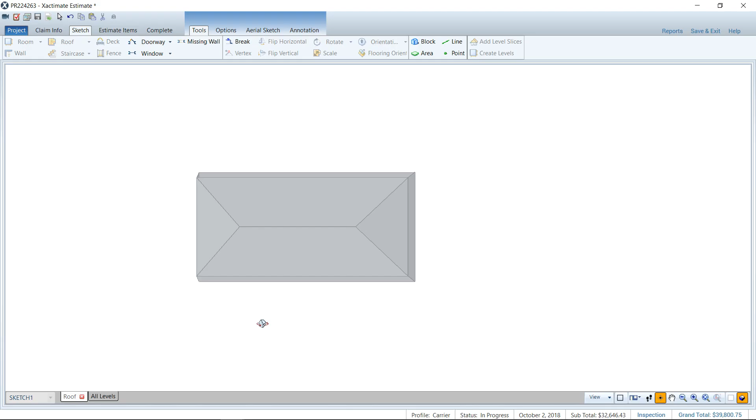It is a hip roof with the gambrel sides that you can see here, very unusual shape. I think it'll be useful for those that haven't ever built a gambrel roof. It's not a true gambrel because it's got this hip on top, which is very interesting, and then got these extending sides. So as you can see, that's going to be a pretty tricky roof to create. We have to set the hip and then adjust the eave heights and do some other fun things. So thought it was a good example of a gambrel style roof that's just a little bit unique and unusual. So let's go take a look at how to sketch that roof.

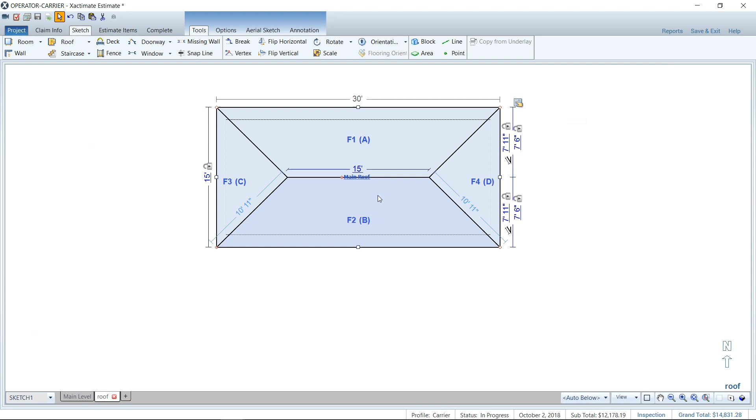So I've already built the main roof here, the main hip in Sketch, and it's got a 4/12 pitch, nothing fancy, just a normal hip. Now what I'm going to do is go up to the roof tool here and grab a flat or shed roof. Now remember the arrow pointing up the slope on the flat roof, and I'll set it here just for you to see an example.

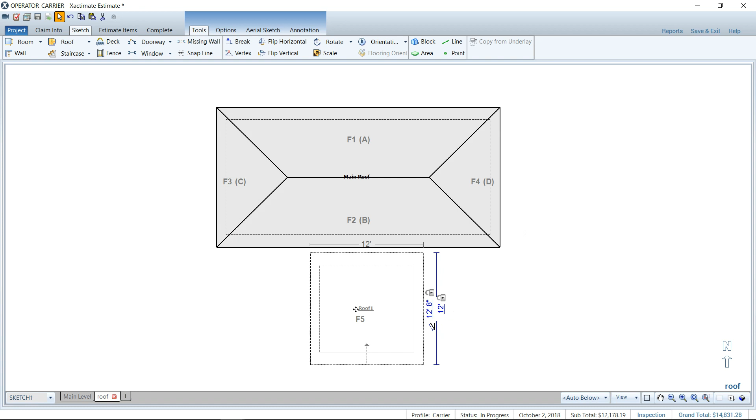The arrow is pointing up the slope. So I'm going to start here on my south face of the main roof to attach this so it goes up into that slope. And I actually attach roof edge to roof edge here. We can have a debate on why and the reasons a little bit later. I like it because it just snaps too, and I'm only doing roof covering here. I'm not worrying about soffit and those other things.

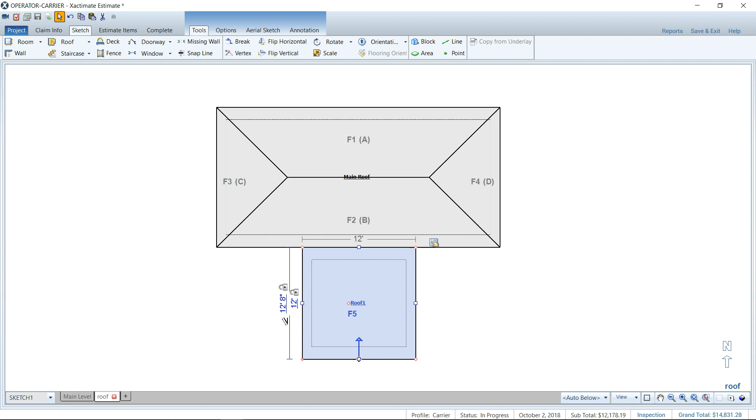And so this works for me. Just watch your dimensions, make sure that you're including all of the roof space rather than figuring in the soffits underneath and going about it that way. So if you want to have a debate about that in the comments, no problem, I'll talk to you down there. But this is the way I'm going to do it, is roof edge to roof edge.

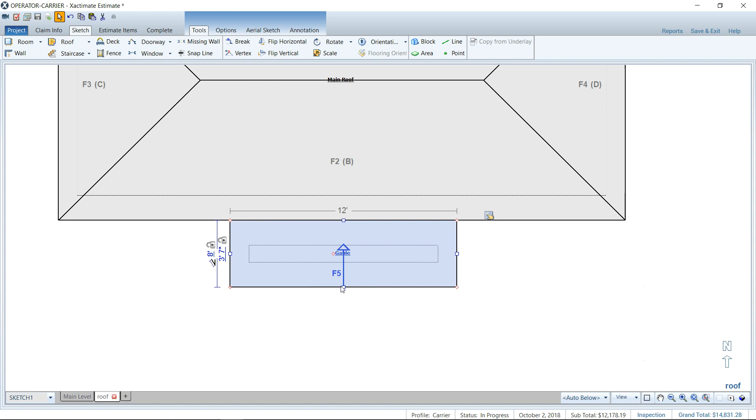And actually, let me go ahead and name this roof while we're here. Go to the properties, and we're actually going to make this a 24/12 pitch as well, as what it was out in the field. Pretty extreme pitch there for the gambrel sides. And I believe once it was vertexed out here, so I'm just going to expand it out to the roof edge here where it meets the hip.

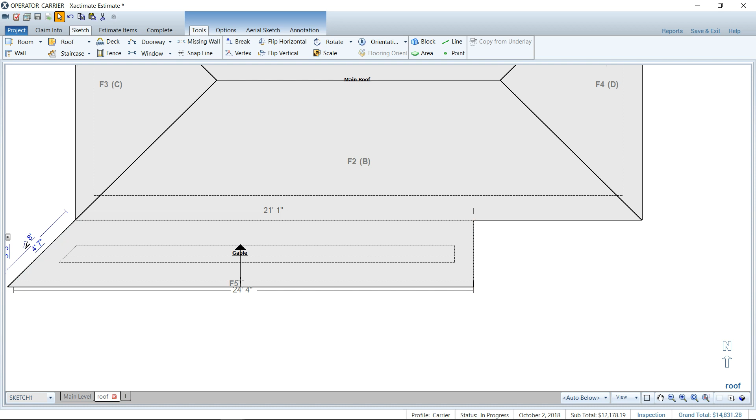Then we're going to grab the little diamond and pull it out to meet the hip angle. And it was actually, I believe, 4'6" or something close to that here for the roof edge. Let's see if it'll let me pull it in. It's being persnickety to 4'6".

There we go. All right. And I'm just going to go ahead and form that on the other side, meet the roof edge, and use the diamond right there to pull that out to meet the hip, like so. Take a look at it in 3D, and it's going to look pretty crazy because I need to adjust my eave heights. So that's the key pivotal thing here, is knowing to adjust your eave height.

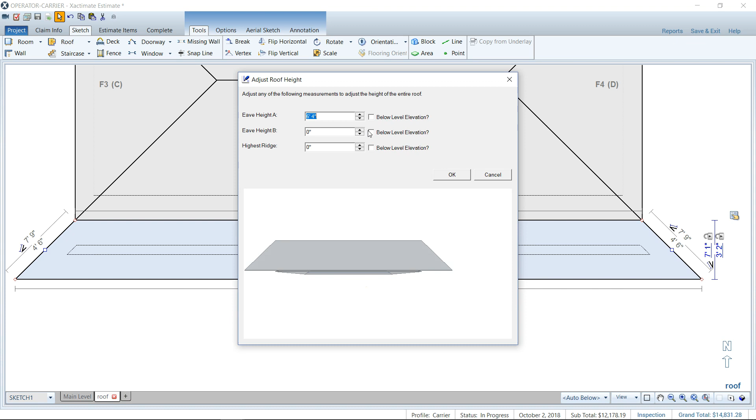So I'm going to go down to adjust height, and the eave height is ending up, the eave height A, which is the top of the slope, is 6'4" above our elevation. We want that eave height to meet 0 at the elevation, and that will drop it down 6'4" below the elevation here. Left click OK. Look at that in 3D. And now we're cooking with some gas here.

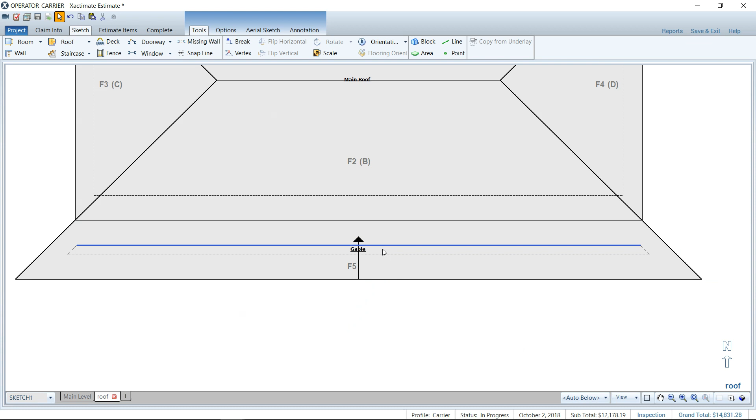Okay, now it is a long overhang. I might have that dimension wrong of 4'6", but you get the idea of how to create this. And maybe it was shorter. Anyhow, it doesn't matter, you'll get the application here.

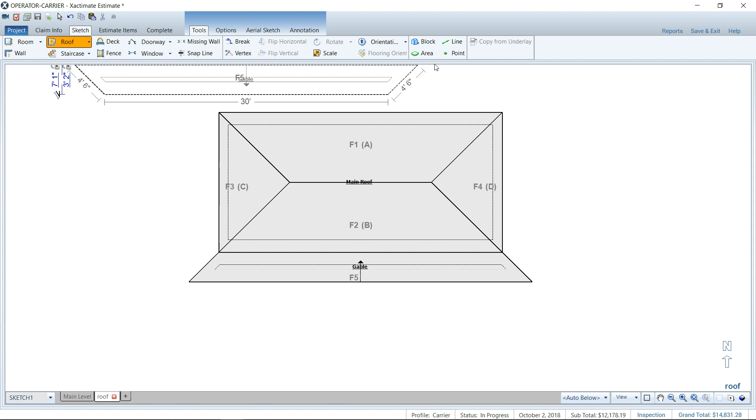I'm going to take that gable and I'm going to right click, copy, right click out in blank space and paste, and that'll give me a carbon copy of that. I can tab it around, and just whoops, shift tab if you go too far, and then drop that guy. It'll actually snap to roof edge up here on the top.

Then I'm going to take that and I'm going to go ahead and right click paste again because it's still copied to my cursor at that point. And I can tab around, and I don't place it actually here, it gets a little weird if you do that. So I place it out in blank space and I just do a random resize, and go in, and I'm grabbing the roof by the label name, by the way, guys.

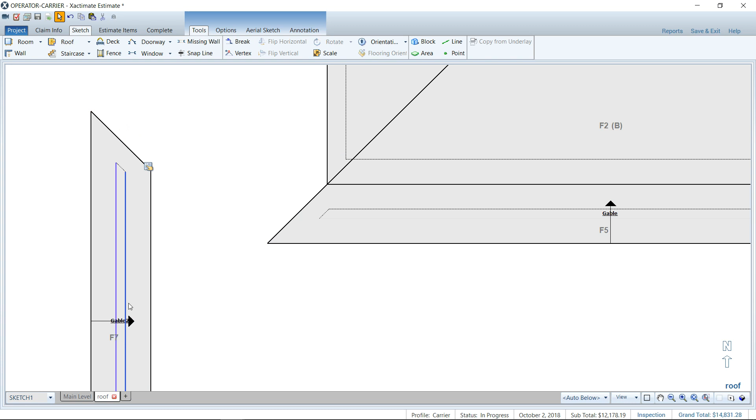You'll notice if you just click on it, it likes to just grab the roof walls, and it gets really frustrating to move the roof. Save yourself some frustration, zoom in and click on that label, and then you'll see that you can move the roof. That was one of the main frustrations of building this, it didn't want to grab the roof, it just wanted to grab the roof walls. So just a side note there.

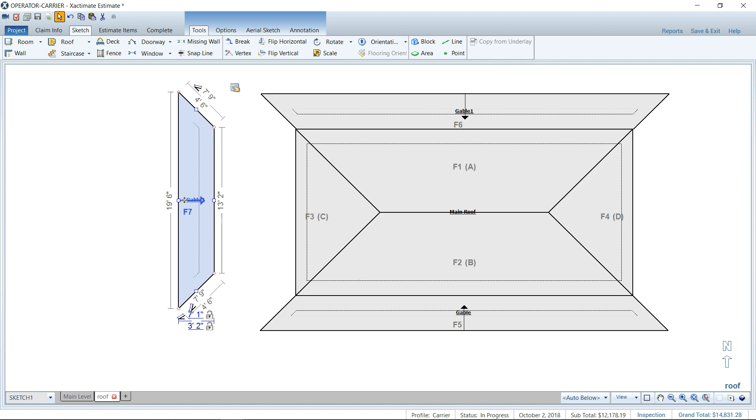Zoom in if you can't see that arrow, it gets sometimes lost in the handles. So it's a little bit too big to fit in there. I want to make it smaller. Click on the roof label, pull in those handles. There we go. Now we should be able to slide it right in here. And I usually line it up to the roof itself first and then pull out the vertices.

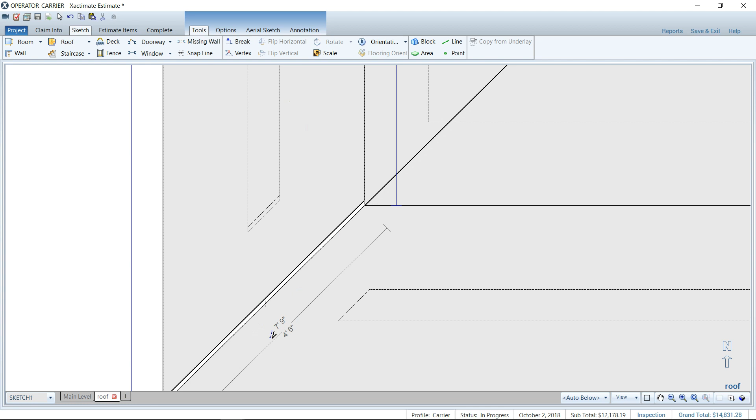To the edge. Xactimate likes to do this funny thing where it just puts it off by a little bit, like that. So be careful, zoom in, make sure you're meeting roof edge to get full coverage.

Up here we've got a little bit of a problem. I need to move this guy over to meet. There we go. It likes to snap too, so it's really not trying to fight itself or fight you. That's kind of nice in this scenario. It likes to snap everything together.

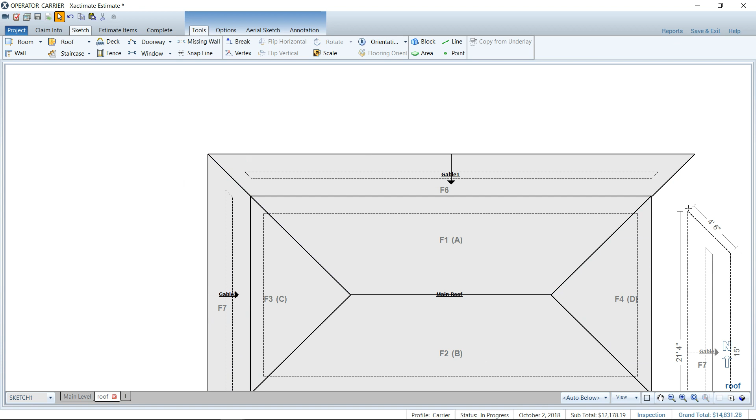So I'm going to go to the gable here. I'm going to copy it. I'm going to paste out in blank space. I'm going to tab that around. And I should be able to just fit it in like a puzzle piece. Sometimes you can, sometimes you can't.

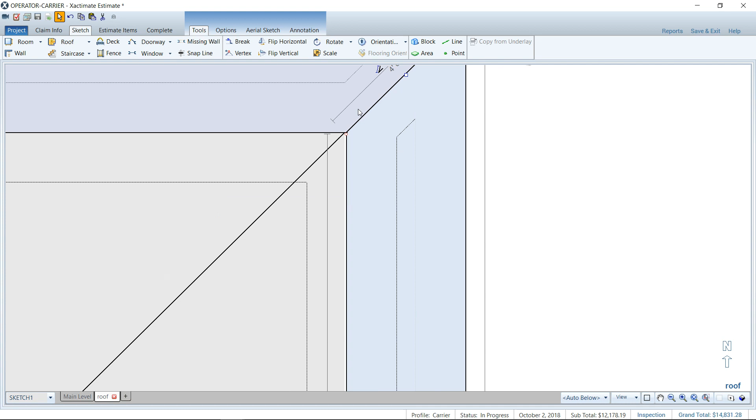Let me set that down. I'm going to move my palette over, just crowding myself a bit. Click on that label, get that in, and let's see if it'll accept it. Yep. Let's look at our, yep, looks like it's meeting pretty well.

Got a little maybe blank space in between the main roof. I'm going to pull that in here. There we go, that looks a little bit better. And just checking for spaces, yeah, it's acting a little funny there. I'll probably pull him out and mess with this a little bit just to dial it in.

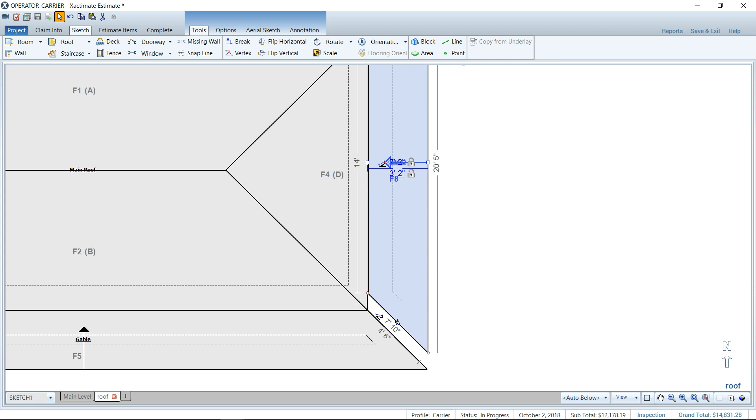But you get the idea of how it wasn't really that painful to create that roof. So again, it's an estimate, I just want to get as close as I can. That looks pretty good, looks like we met each other, and so we've got the roof edge meeting the roof edge there.

So we can take a look at that in 3D and just see how it's looking here. Looks pretty good, and I think I got all the spaces covered, so we don't really have any spaces in between where those gable roofs meet the main roof.

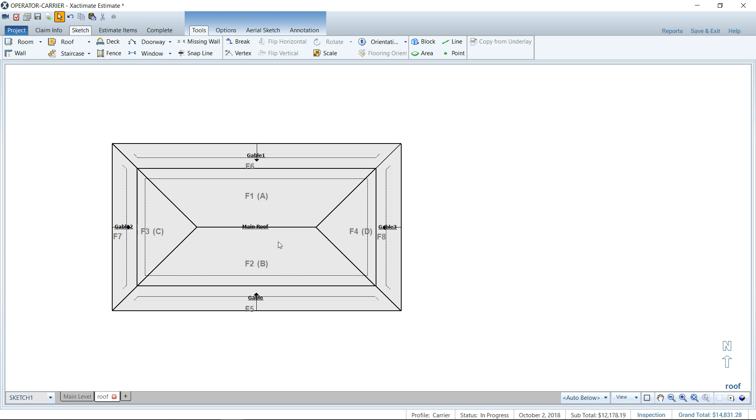Now, the one thing I do need to do is connect all the roofs together so that when I put the roofing material on, it goes to all slopes. Right now, if I go over to estimate items, you can see it's all separated out, and I'd have to add shingles over and over again, which would be really dumb.

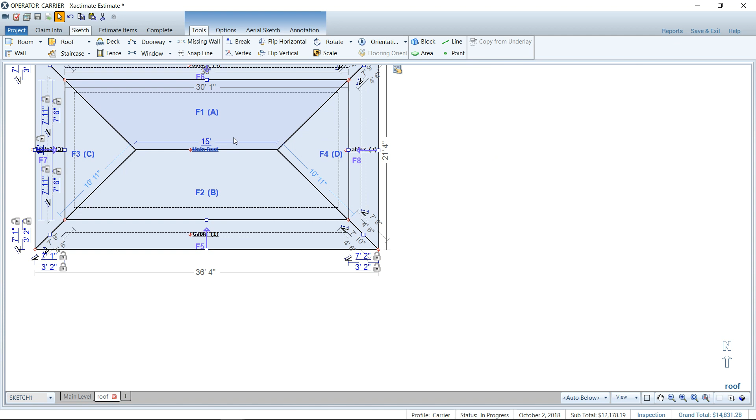So in the sketch, you can select all by lassoing here in the blank space, right click, and then go to Combine, or Control-Shift-C, and that will make all of these a part of the main roof. You can see 1, 2, 3, and 4, that they're all part or have part numbers. They're part of the main roof.

So if you go back to Estimate Items, just got the main roof there. It looks great, so don't forget that last step. Whenever you pull in roofs from the roof tool and add them, they're coming in as separate entities. So don't forget about that and get those added or combined together with Control-Shift-C.

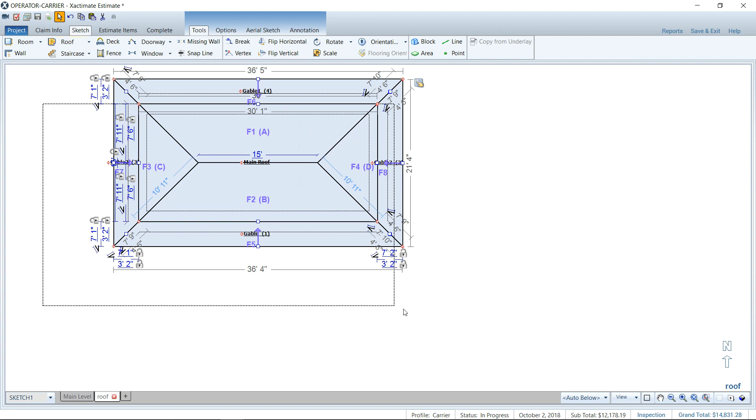Lasso all of them, make sure you get all of them too. Don't leave one off like that. Get all of them in blue and then combine them. So that's how I created that roof in Sketch.